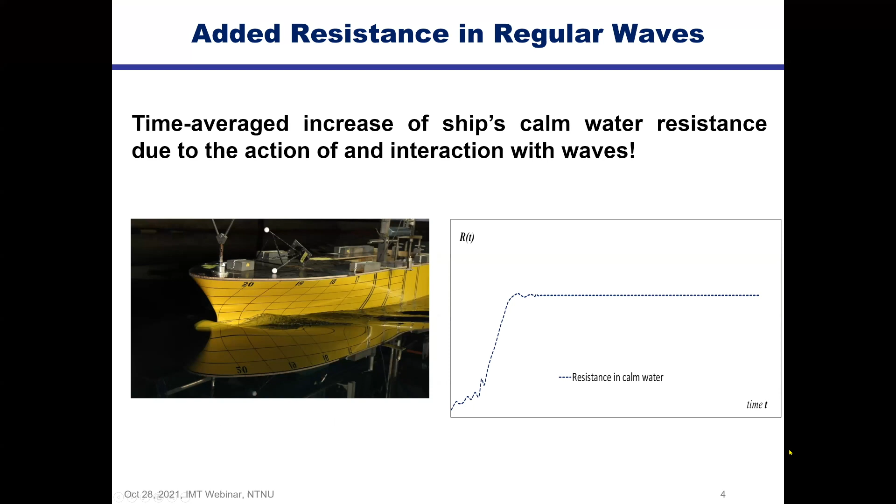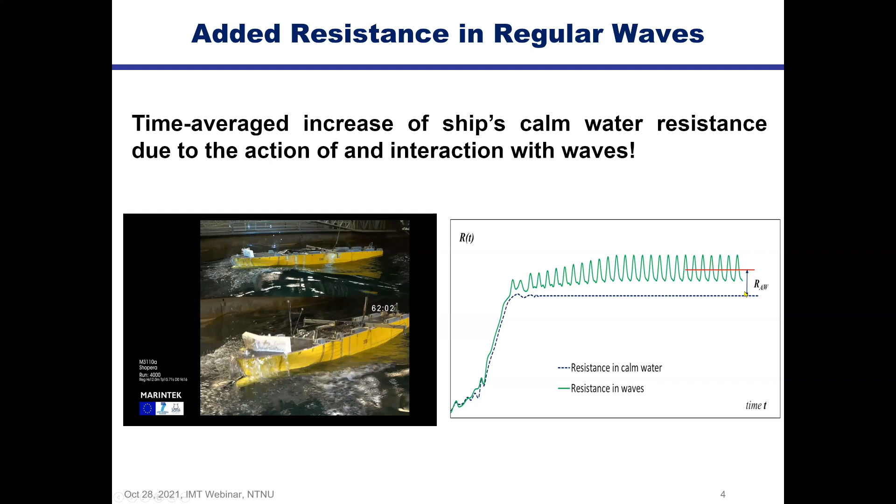In a towing tank, we would first measure the resistance in calm water, and we can get a curve. That is the calm water resistance. And then if we repeat the test in waves, then we may measure a second curve, and this curve is the resistance exerting on the ship in waves. So what we care about is this time average increase compared to the resistance in calm water. We are not talking about the instantaneous difference, so it's the time average increase we care about.

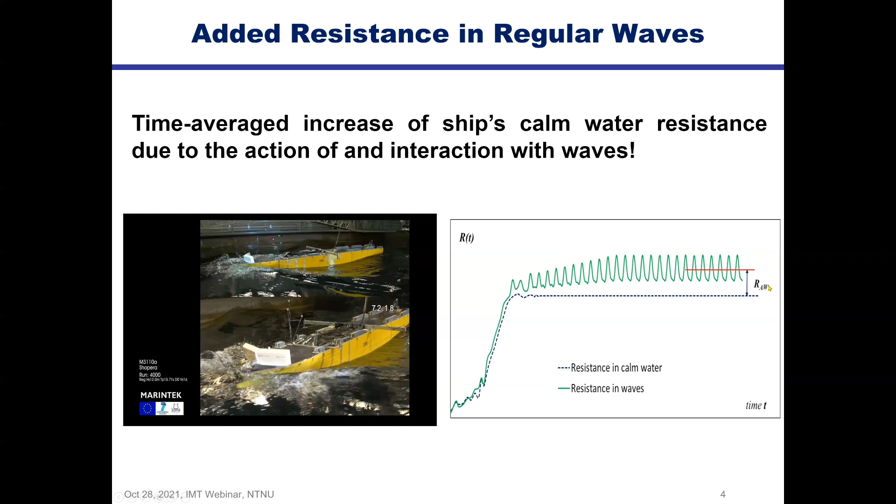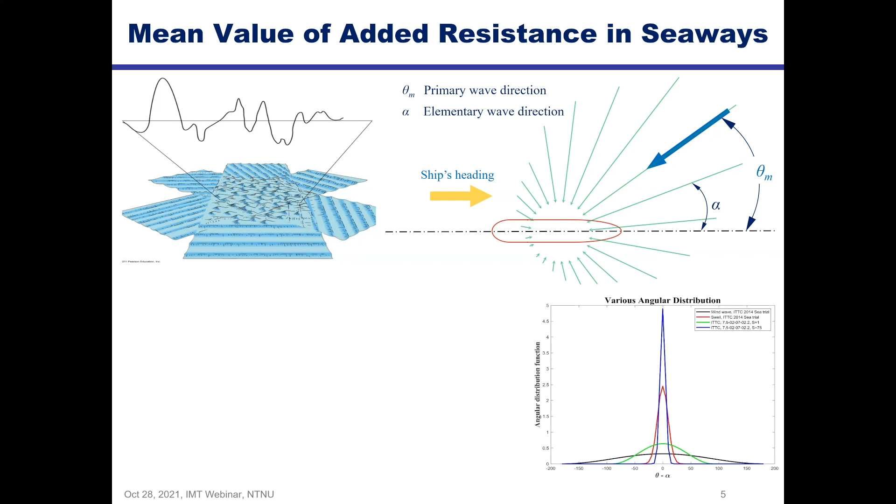So for ships sailing in a seaway, the seaway is normally described by a spectrum. Of course, in reality, when the ship sails in a seaway, the wave or the seaway condition comes from a certain direction, what we call the primary wave direction. For this wave, there will be many elementary waves coming from random directions, all the directions actually.

Depending on the scenario, there can be different angular distribution functions employed to describe this situation. That being said, if the seaway condition can be described by a directional spectrum, which includes not only the frequency spectrum but also the angular distribution, then the mean added resistance in the natural seaway can be calculated using this double integration. So given this frequency spectrum and angular distribution, we need to determine the added resistance for a given ship speed, arbitrary wave heading and arbitrary frequencies. So we need this transfer function to derive the mean added resistance in waves.

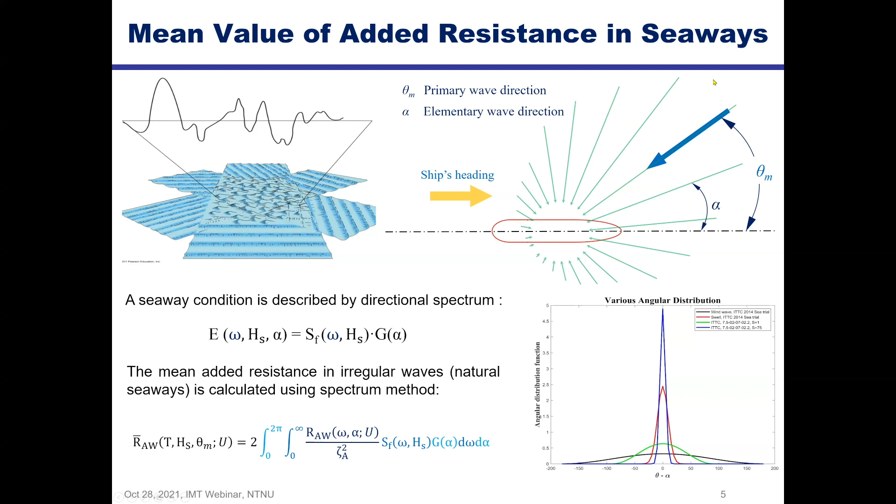So for the prediction of this RAW, or this transfer function of added resistance in regular waves, there are actually quite a few methods available. As we see, this is essentially a sea-keeping problem, so all the methods that were developed for sea-keeping prediction can be used or extended to predict added resistance.

This 27th ITTC Sea-Keeping Committee has reviewed all these methods and given a very thorough review. They can be roughly classified into 4 categories. The first is the towing tank test, regarded as the most reliable approach and the yardstick for developing or validating numerical tools. Besides that, there are also CFD methods, potential flow methods, as well as analytical or semi-empirical approaches.

At the moment, there are also new data-driven methods emerging, but these are mostly in a primitive stage because of the limitation of available data.

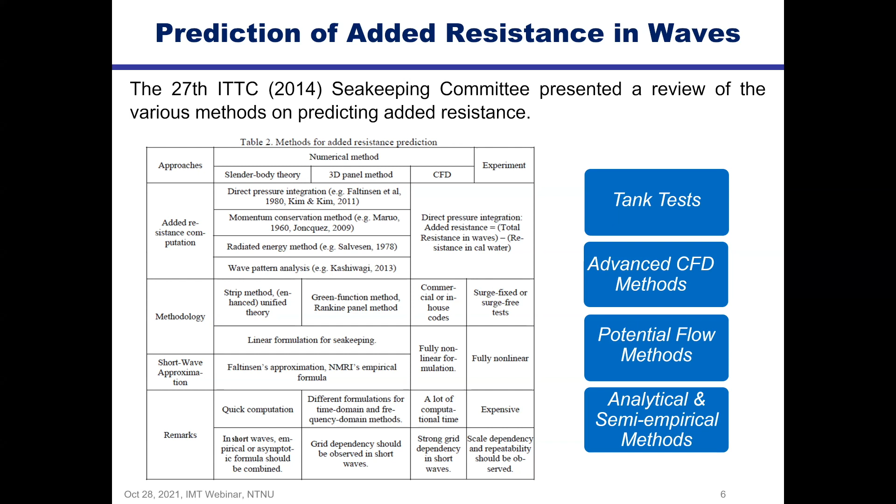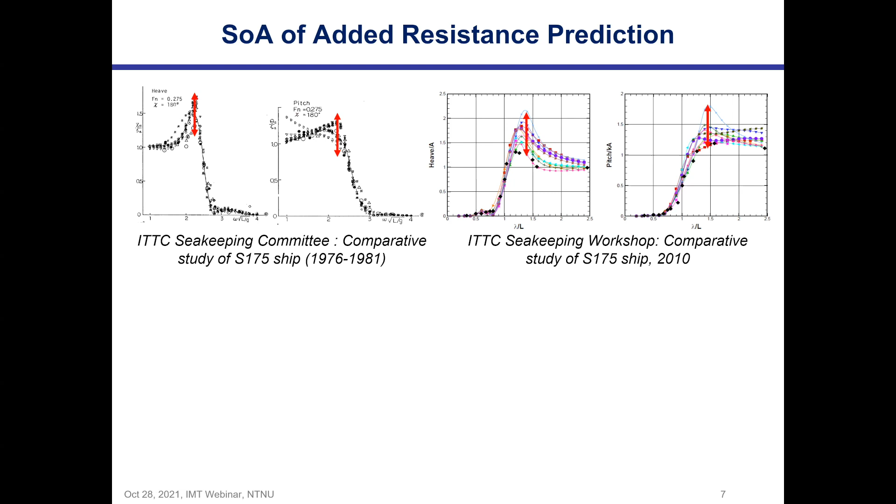You can see that not only in the peak region, but also in the short waves, high frequency region, there's a lot of scattering. Considering this situation, it seems it will take a long time for all the methods to arrive at a more converged state, and probably a better approach would be to develop a transparent, semi-empirical approach to tackle this problem.

This was the thinking we developed some years ago, and we started to work on this semi-empirical approach.

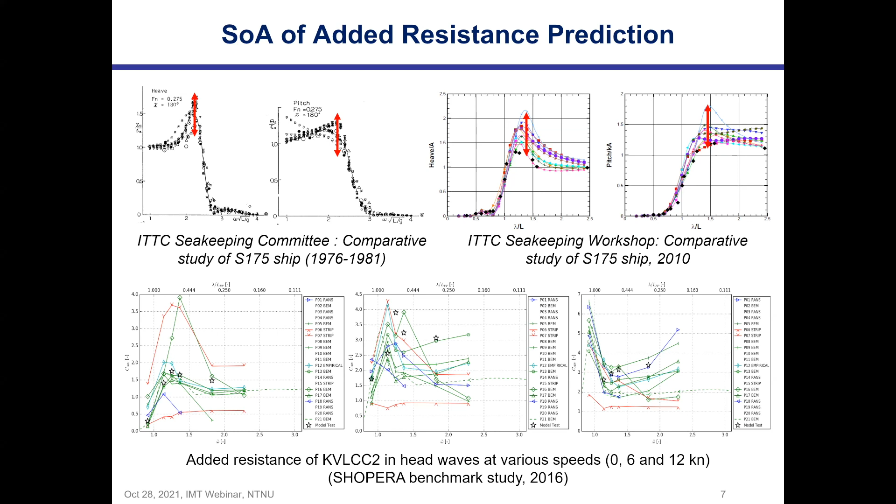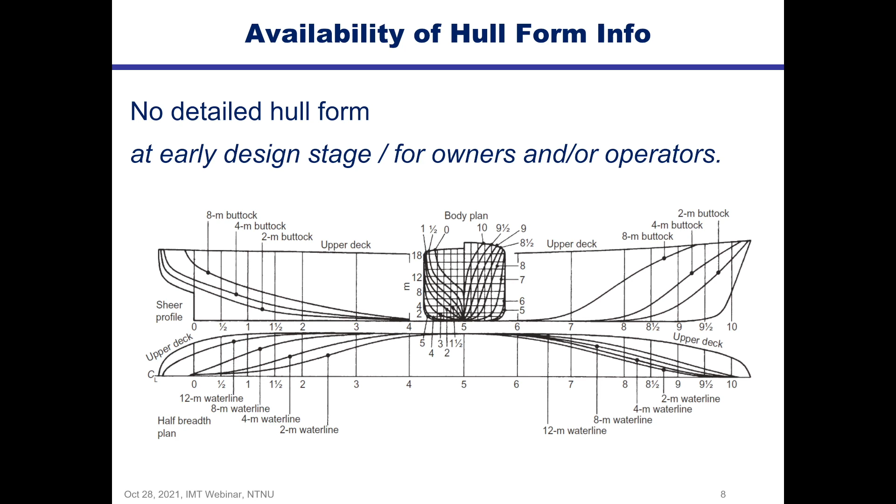Another point I'd like to highlight is that in practice, there are many scenarios where we don't even have the detailed hull form to set up a model to run advanced high-fidelity simulations. For example, in the early design stage, we don't have the hull form yet. Also, for owners and operators, the most detailed information they may have is the lines plan, and constructing a model for simulation from just the lines plan will actually induce further problems. All of this led us to consider developing semi-empirical approaches.

Besides that, there were some urgent demands from the industry. First of all, at that time we were working on the minimum propulsive power assessment problem, and there was a demand for a semi-empirical approach, but there wasn't one available.

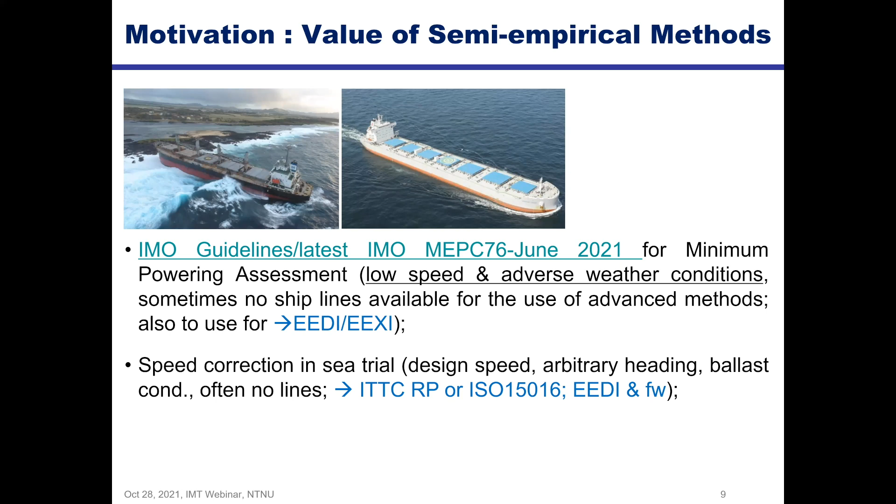Secondly, there was also a demand from speed correction in sea trials. It was very interesting that we were approached by both owners and designers complaining about sea trial results, which made us further study this procedure and identify some further problems.

A third subject is from ship performance analysis, which is of high interest at the moment. You can imagine that for data monitored on board ships, this data is heavily polluted by the operational condition and the seaway, and needs to be cleaned or processed before further treatment.

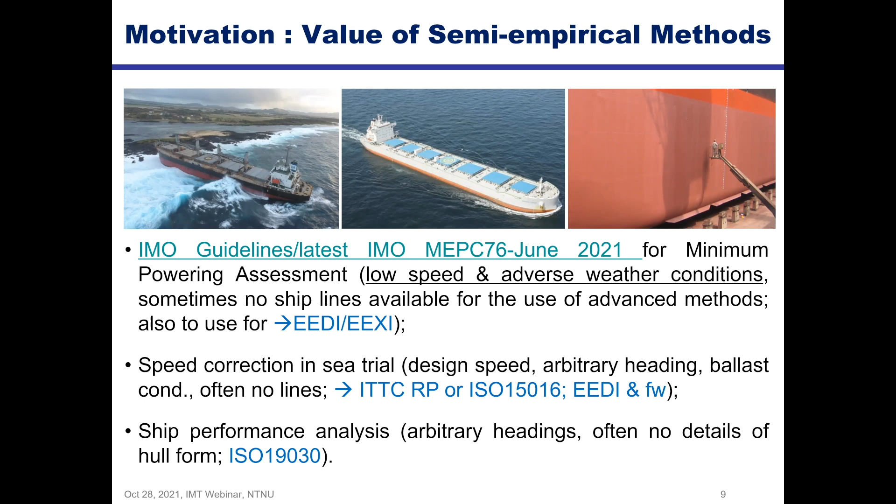That is our motivation, and next I will start to elaborate how we developed this method.

First things first, here is a brief timeline of the development of this method. We started development in the Shopera project in 2013, coordinated by the National Technical University of Athens. In the first stage, we developed the method from head waves to beam waves. Later, from 2017 to 2020, we extended the method to arbitrary headings and validated it. This work was done at Nanyang Technological University.

During this process, Maric China was supporting our development very actively. So in the end, we named this method the SNNM method, just to acknowledge the contribution of each consortium and institution.

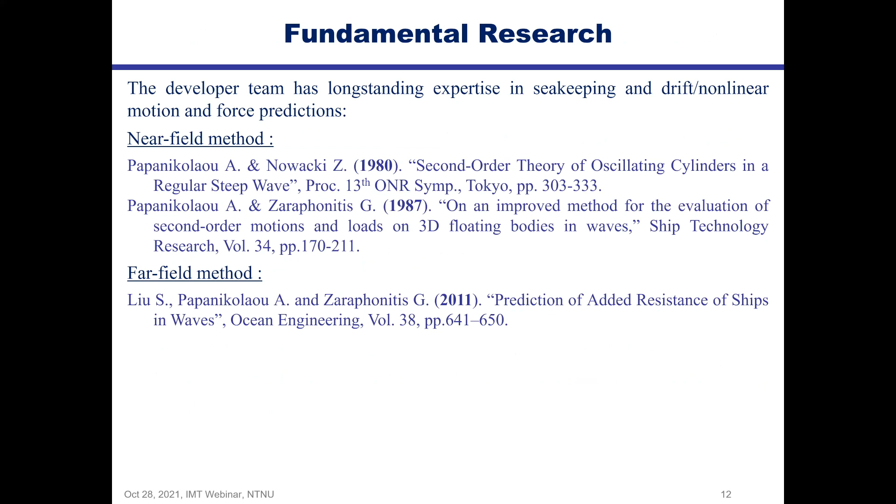A few words about the background of this developer team. At the National Technical University of Athens, Professor Papanikolaou already worked on this problem in the early 80s. For myself, during my PhD study, I also worked on a far-field method to predict added resistance, and more recently we have been focusing on the diffraction effect. All this fundamental research provided us very useful tools to investigate the relationship between the hull form, wave condition, and added resistance.

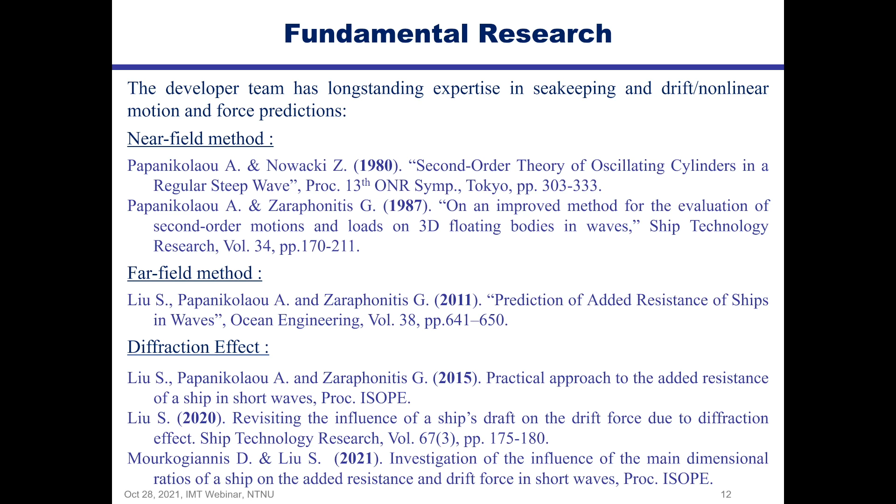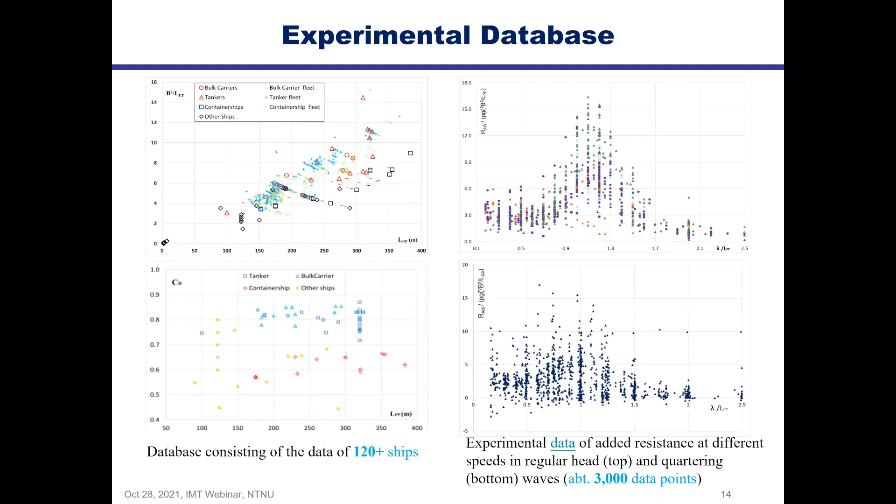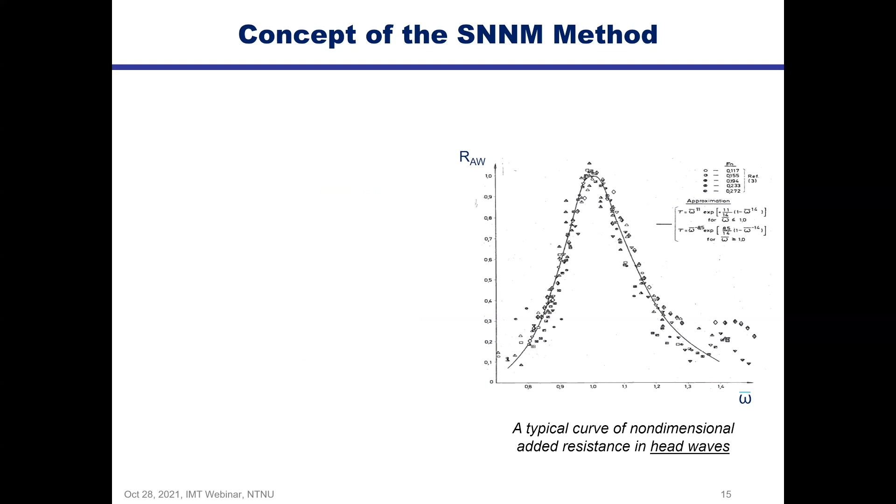Coming to the concept of the method itself, this slide shows a typical graph for this resistance increase in head waves. For predicting the added resistance, we followed a quite traditional approach. The total resistance increase is approximated by the summation of the reflection effect and motion effect. For the reflection effect, we based our work on the method proposed by Professor Faltinsen, and for the motion effect, we used the method proposed by Jinkine and Ferdinande in the 70s.

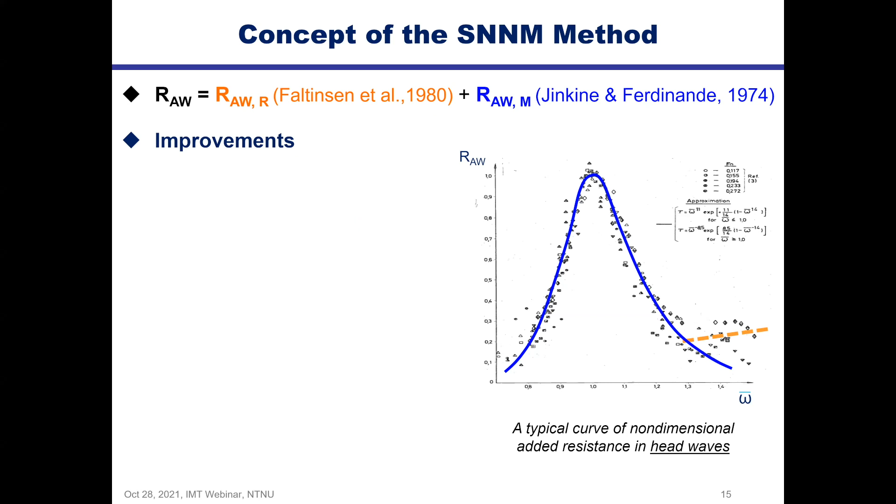For the short waves, the method of Professor Faltinsen is mainly applied only for short waves, and for the motion effect, this empirical approach by Jinkine and Ferdinande can be applied. But neither method is perfect. There were a lot of limitations to these methods, considering the time and the specific task they were addressing when they were developed. So our work was actually to introduce more improvements and corrections to make the formulas more versatile, so that they can deal with various scenarios.

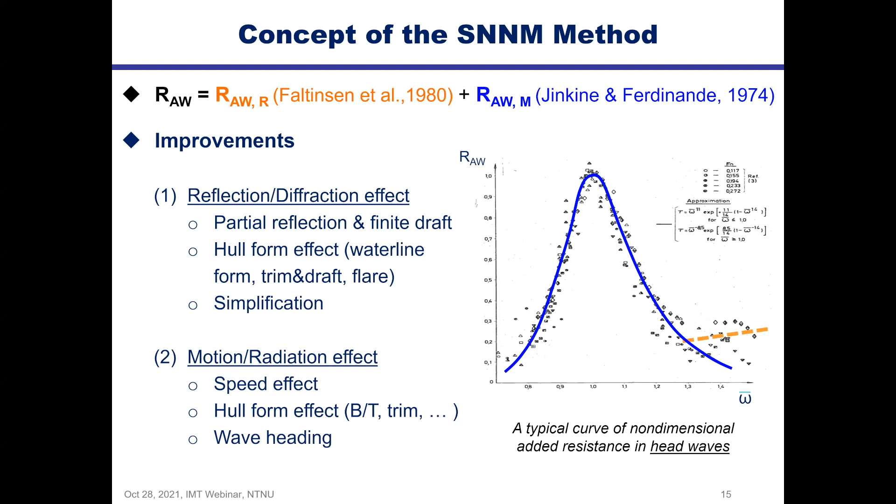In the following, I will be elaborating on how these improvements were introduced. Let's start from the reflection effect, or diffraction effect.

For this part, the pioneering work is from Havelock, when he studied the drift force exerting on wave breakers. He developed this formula.

Following that, Fujii and Takahashi introduced two correcting factors: one for the speed effect, one for the reflection coefficient. This reflection coefficient was actually studied by many physicists. The specific form was proposed by Ursell, or Evans and Morris, for different directions. It is a reflection coefficient for when the wave is reflected by a thin barrier.

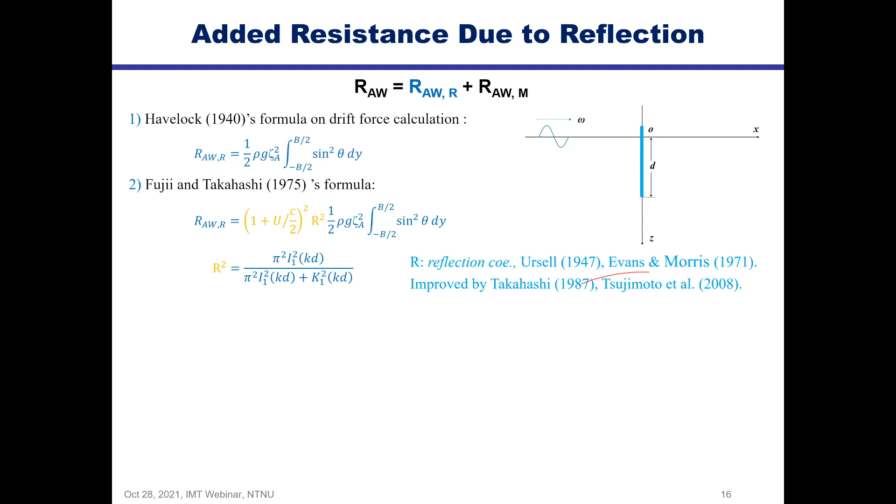And this approach was further improved by Takahashi and Tsujimoto et al. in 2008.

A third work was from Professor Faltinsen in the 1980s. He proposed a very elegant method which is applicable to arbitrary wave headings, and also accounts for the forward speed effect. In his work, the viscous effect and the diffraction effect from sharp corners were neglected.

A fourth work is from Kwon in 1982. He introduced three correction factors: one for speed, one for scattering, similar to the reflection coefficient, and another very interesting one, the finite draft effect. What he said essentially is that when the reflection phenomenon takes place, the reflected wave will only have impact on the structure from the free surface to the bottom. This is very correct, and it was also theoretically confirmed by Ogiwara in 1996. However, this finite draft effect was totally neglected by the following researchers.

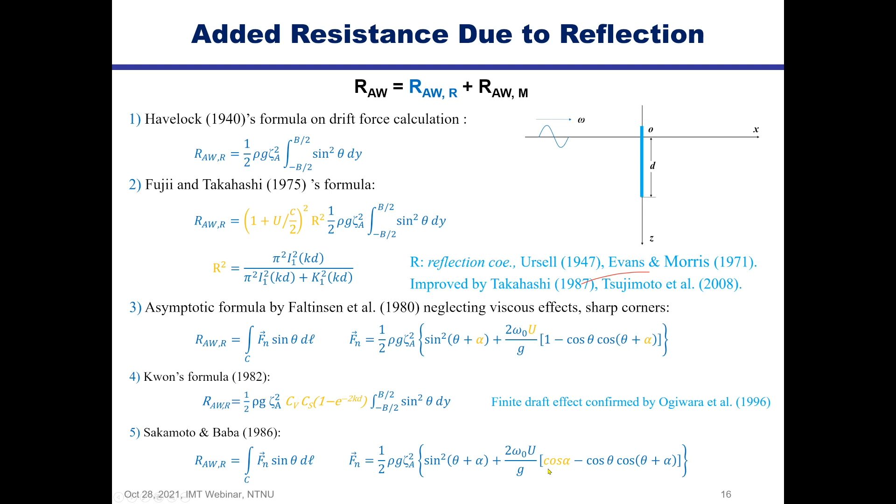Reviewing all this work, we proposed a physically more complete formula. It is based on the work of Professor Faltinsen, but we introduce here the finite draft effect and reflection coefficient, as well as the contribution from the effect of the flare angle at the waterline. Of course, we need to note that this reflection coefficient is not for a thin barrier. Instead, it is for a thick barrier, which is more ship-like.

Very satisfactory. For more general cases, particularly for ships, for fine ships sailing with forward speed, we would still need to introduce another factor to make empirical corrections, so that this formula can be applied to both full ships and fine ships at various speed.

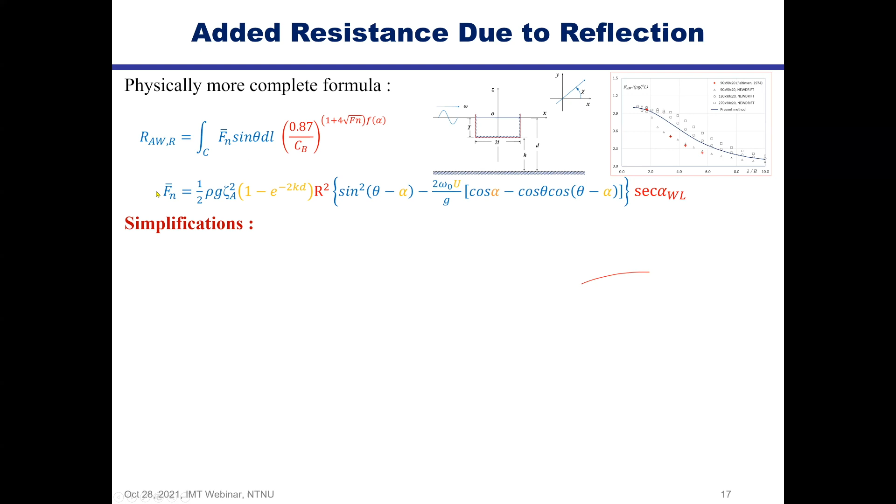So next, we introduced some simplifications for practical reasons. The first thing we did was to use only one or two points on the waterline. We introduce a length of entrance and length of run for the waterline. By doing that, we can have two components calculating this added resistance due to diffraction effect, so that we can avoid calculating this integral.

So calculating the integral is not a big issue, but in practice, very often we like the formula to be as transparent as possible and as easy as possible for the practicing engineers.

Following that, we also need to further simplify this draft correction, which includes two terms. One is this 1 minus e to the power of negative 2kd - this is the finite draft effect. Another one is this r squared. You can see that this r squared calculation itself requires a lot of effort.

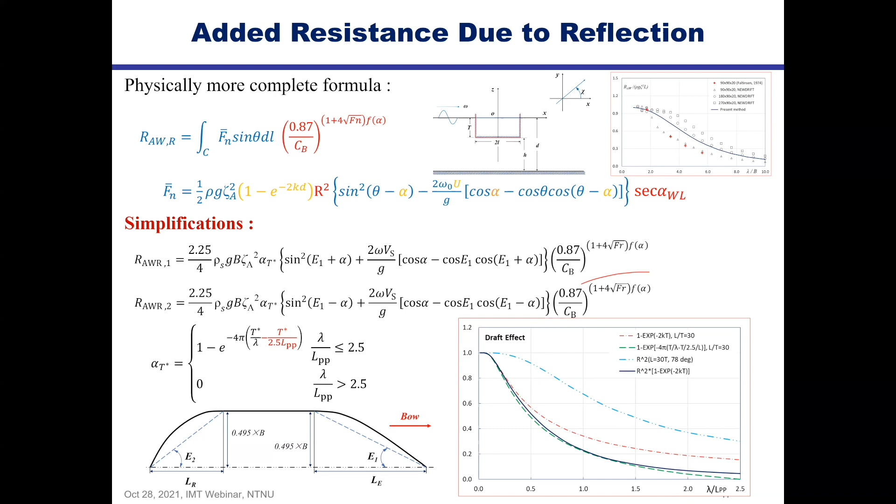So with that, we finished our work for the diffraction or reflection effect. Next, we are going to introduce the effects for the motion effects.

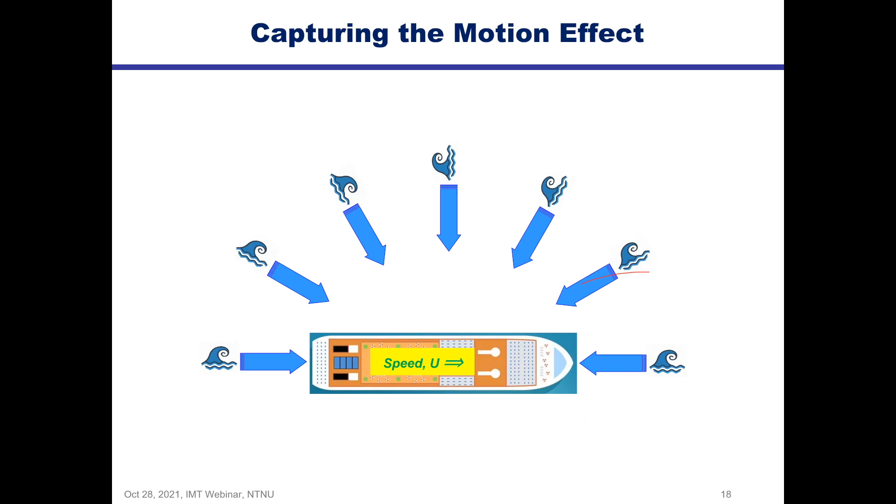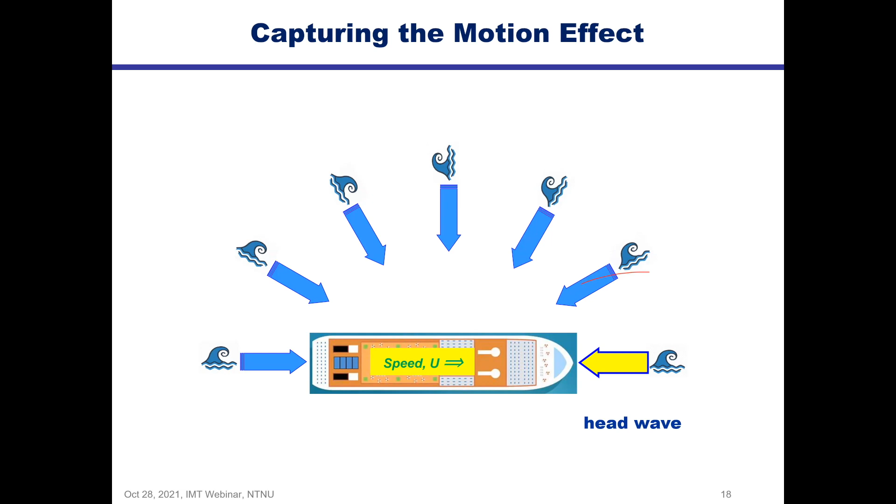So for a ship in longer waves, wave may come from any direction. The method of Jinkine-Ferdinande is working for head wave only. So we started also working on head waves, and by introducing more corrections.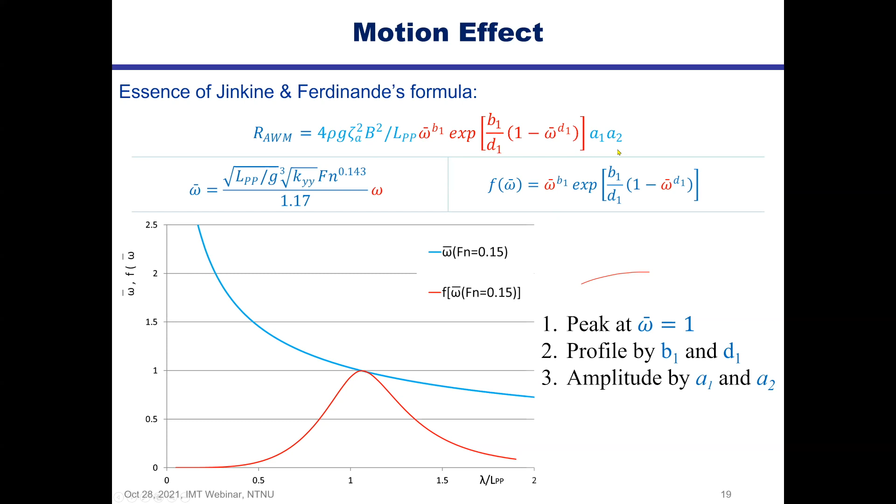So in order to improve that, we need to think: if we'd like to adjust the position of the peak, we need to adjust the omega bar. If we'd like to adjust this profile, we need to adjust B1 and D1. The same applies to the amplitude - if we'd like to adjust the amplitude, we need to add some extra terms. So that is the structure.

And the first work we did was actually to improve the formula for ship speed, more specifically to have the formula work well for low speed, because this was directly driven by the IMO developing the method for supporting the IMO guideline for minimum propulsive power assessment. So for that work, mainly we are concerned at Froude numbers equal to 0.05 and even less.

So we examined the performance of this omega function of omega bar. When the Froude number is extremely small, following this expression, it would give us this red curve - totally wrong. And the same applies to a2, which is about the amplitude. If we follow the original approach, it leads to the situation that at Froude number equal to 0, the amplitude will be 0. So these are not correct.

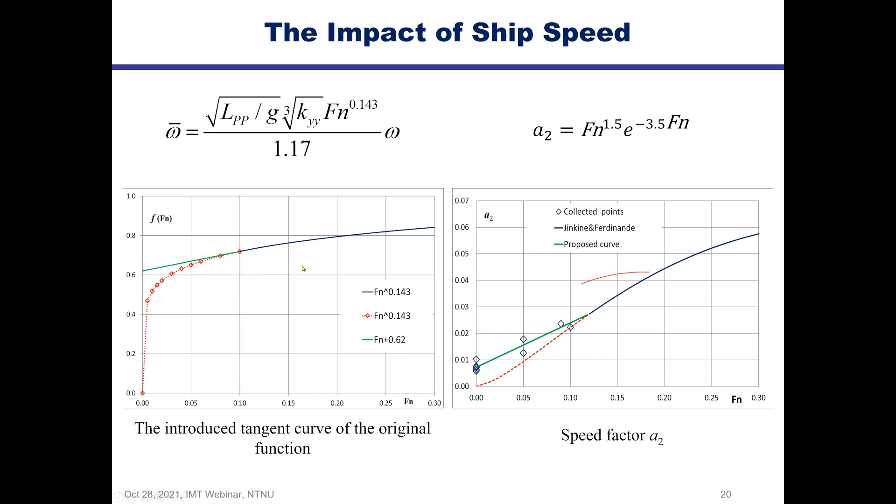So what we did was use some experimental data and numerically generated data to get these omega bar values for this low speed range. And then we could introduce some simple expressions for this low speed range. So this is the first work we did.

A second work was actually on the impact of ship type, noted by block coefficient. In our early application, we noted that there was some slight mismatch between the prediction and actually experimental results, particularly for full ships. It's not surprising, because the method of Jinkine and Ferdinande was originally developed for fast cargo ships.

We carried out numerical calculations, and we justified this ship type impact in terms of block coefficient, and we introduced this block coefficient into the formula - so this can actually be viewed as a result of a data-driven approach. We checked the data, identified the problem, and then we proposed a solution.

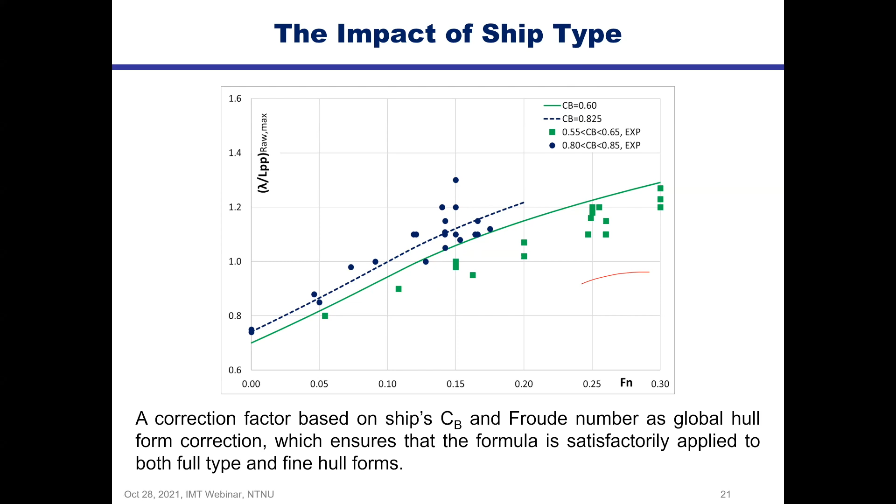So the next problem we studied was the impact of main dimension ratios, given a situation of B over T. When B over T systematically changes, we can actually predict the added resistance, and we can see that it follows a specific trend. When B over T increases, both the amplitude and the location of the peak value change in a certain direction. So if we pick out this value, we can see that they follow a certain trend at different speeds, at different Froude numbers.

And this can be captured by introducing some very simple functions based on this B over T value. So with this, we can extend the formula to work not only for standard B over T about 2.5 to 3, but also for very high B over T values. It is important for ships in ballast condition and bulk carriers.

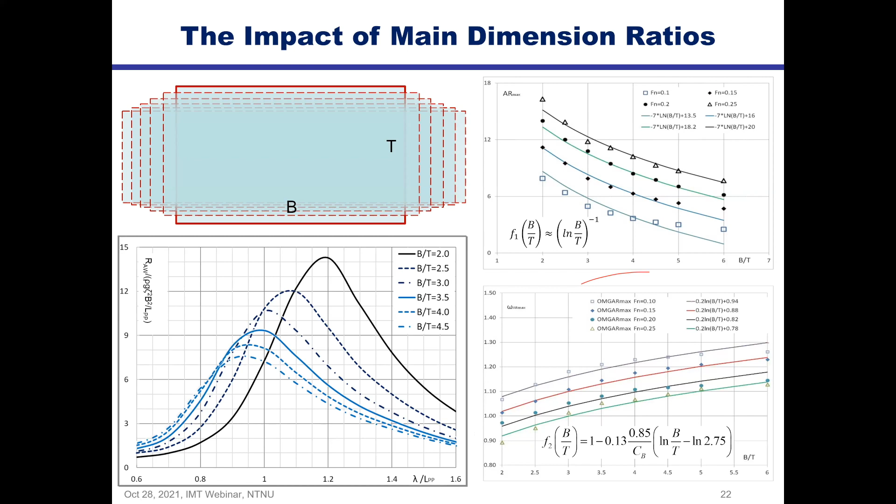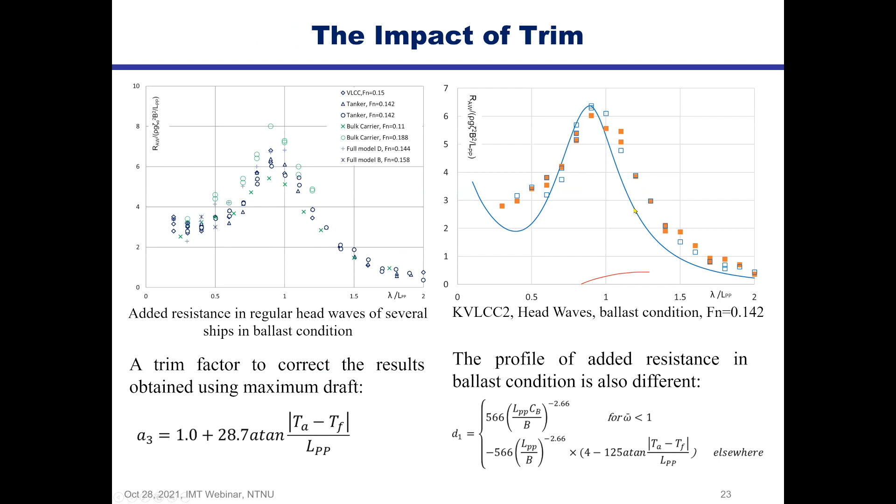It seems that they have their own specific pattern, and then we examined the difference between the original prediction and this experimental data. By examining the difference, we identified several correction factors, including the amplitude, as well as this D1, which is used to calibrate this profile in longer waves. So that is our work on the impact of trim.

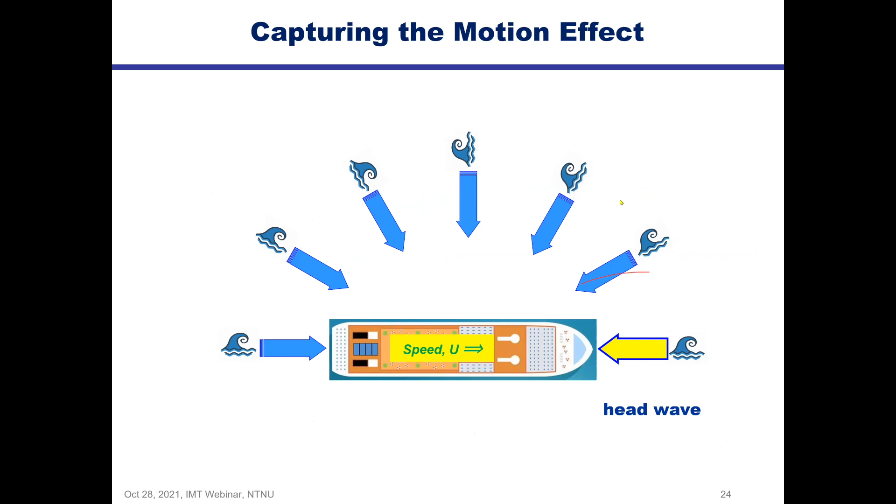So with that, we finished our work extending the formula in head waves. Next, we worked on following waves. Following waves is a very tricky problem - here you can see a container ship in following waves, with the container ship features overhang. So this kind of feature is very difficult to capture for any type or kind of numerical approach.

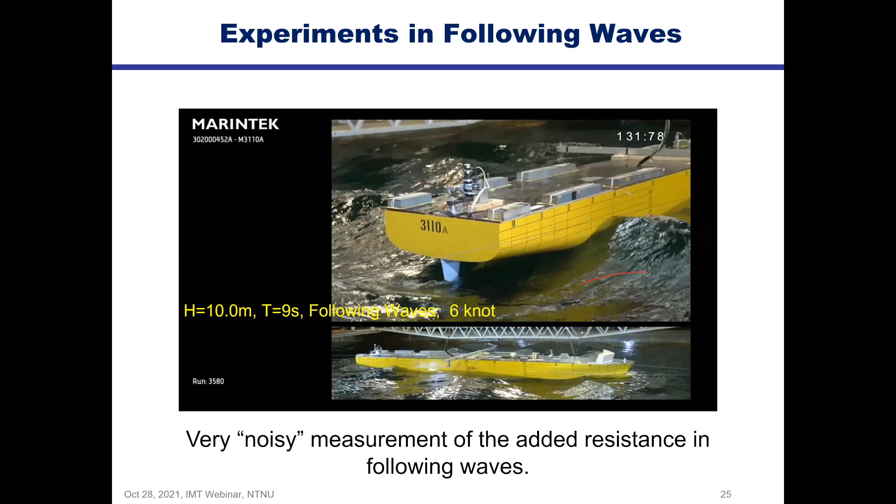For us, this was also a very interesting point to work on. Remember that we already have a formula that works at zero speed for head waves. For a fore-aft symmetric hull form, whether the wave comes from a head direction or from stern direction, it is the same from the hydrodynamic point of view for a symmetric ship.

This gives us the courage to apply the method for following waves. So when we applied the original formula to predict the added resistance of a bulk carrier at zero speed in following waves, the agreement between this prediction and the experimental result was excellent. Remember that for short waves, we already have a formula which is valid for

arbitrary directions and arbitrary speed. So our task then is reduced to working out the radiation effect, how this peak point will change with the increase of speed in following waves. So that is our task.

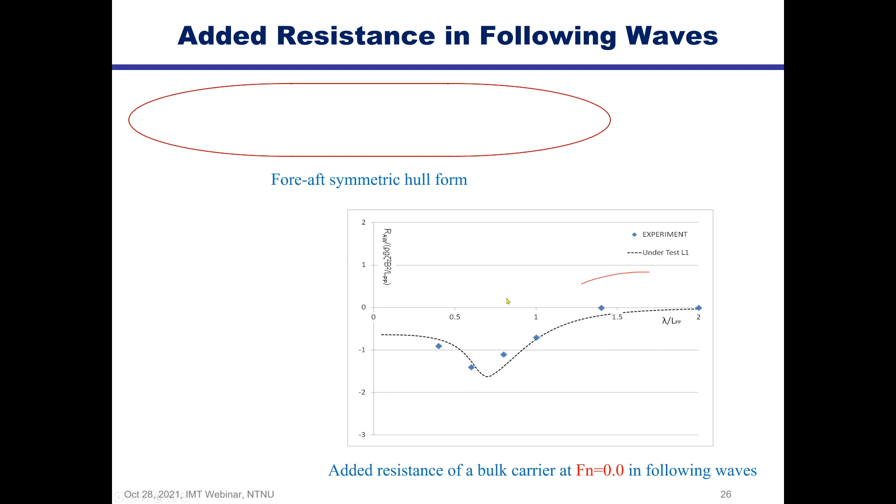Actually, there was not much work on added resistance in following waves. We didn't have much idea. However, we were inspired by the concept when examining this formula for the diffraction problem, examining this formula for diffraction for the resistance, added resistance due to diffraction.

If we set this as 0, we can get the conclusion U equals VG. This is very interesting. That means when the ship speed equals the group speed, then the added resistance due to diffraction is 0. This is a very interesting point. It is in line with the fact that the energy of the wave propagates at group velocity.

So this gives us the reason to examine or check the relative velocity between ship speed and wave velocity, whether it is group velocity or phase velocity. From that point we could actually get our formula for following waves.

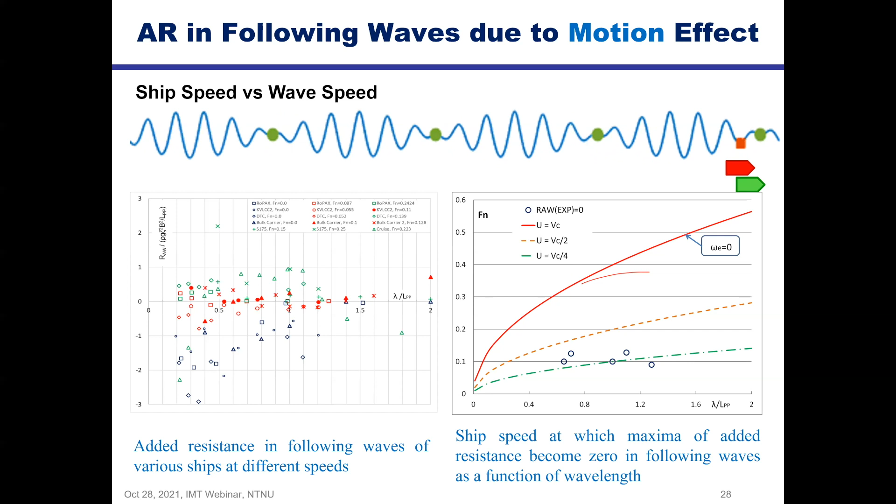So this is a very important reference condition. Having this reference condition in mind, we could do the following. When the Froude number is 0, ship speed is 0, we apply the original formula to calculate the added resistance in following waves. In that case, it is a drift force pointing in the positive direction — it's added thrust.

And when the ship speed is half of the group velocity, following our conclusion, the radiation effect should be 0. This gives us the conclusion that the ship needs a speed of half of the group velocity to escape from the drifting effect of the wave.

Then if we give the ship an extra speed of half of the group velocity, the added resistance exerting on the ship would be the same as if the ship were in head waves at zero speed. So for any points between zero speed and half of group velocity, or between half of the group velocity and group velocity, we can apply linear interpolation.

For even higher ship speed, we can treat the scenario as if the ship were in head waves, but applying this relative Froude number, defined as U minus group velocity, over the square root of GL. With that, we get a solution for the added resistance in following waves.

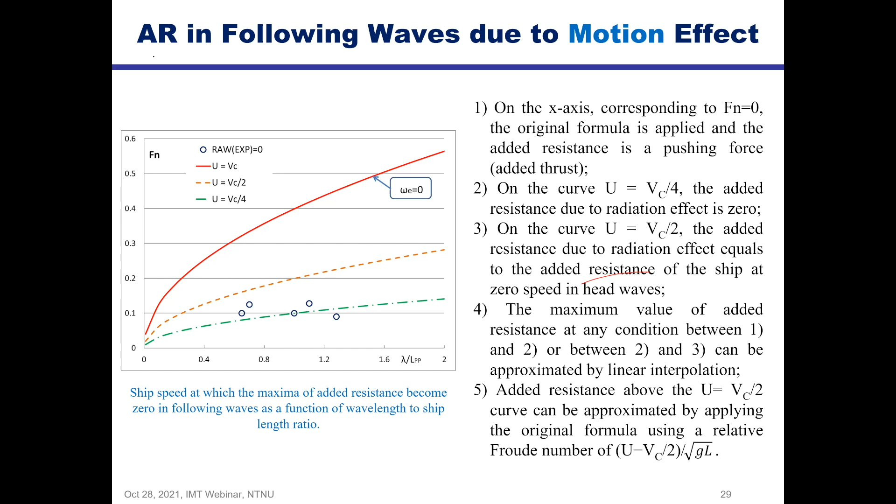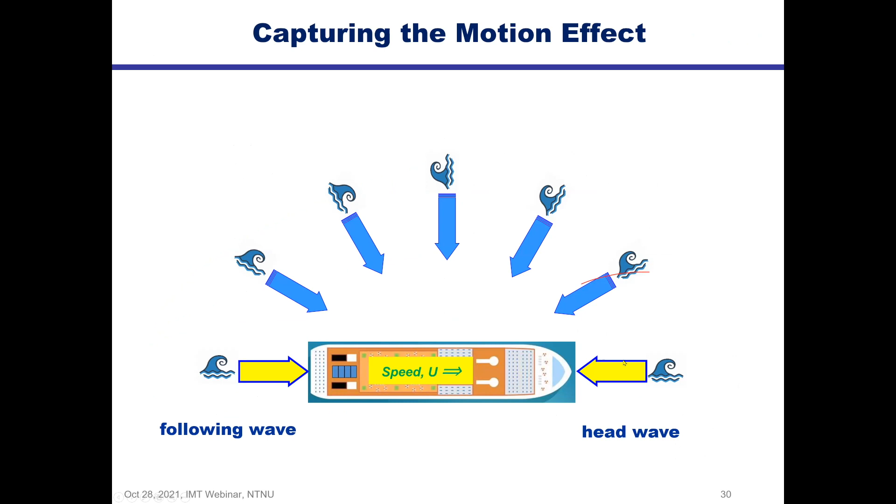Once we finish this step, we can start working for other headings. For bow waves, following sea-keeping theory, we know the resonance region will change with the frequency we encounter, and we can calibrate this peak value with observed experimental data and numerical data. So we can get simple functions to capture the change of the maximum value of the added resistance and its location. For stern oblique wave cases, remember we have extended the formula to the beam wave case already. Since this value in stern oblique waves is normally very small, we can apply direct interpolation between the beam case and following wave case to get this result.

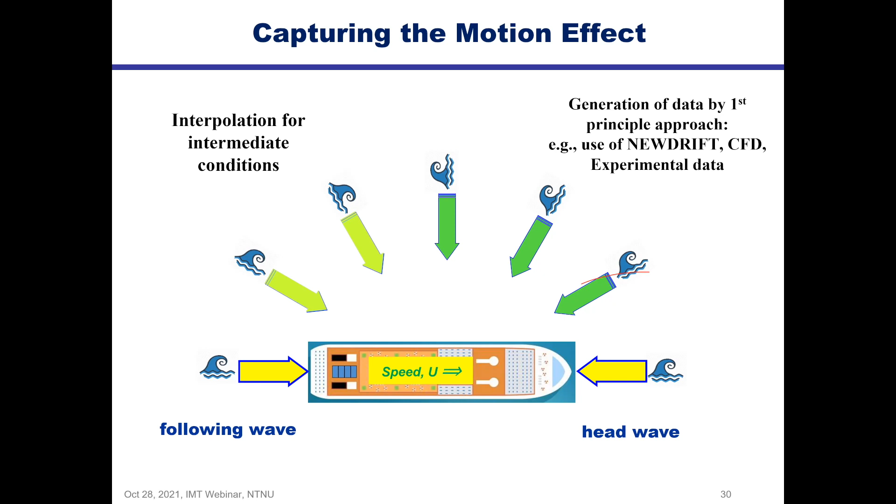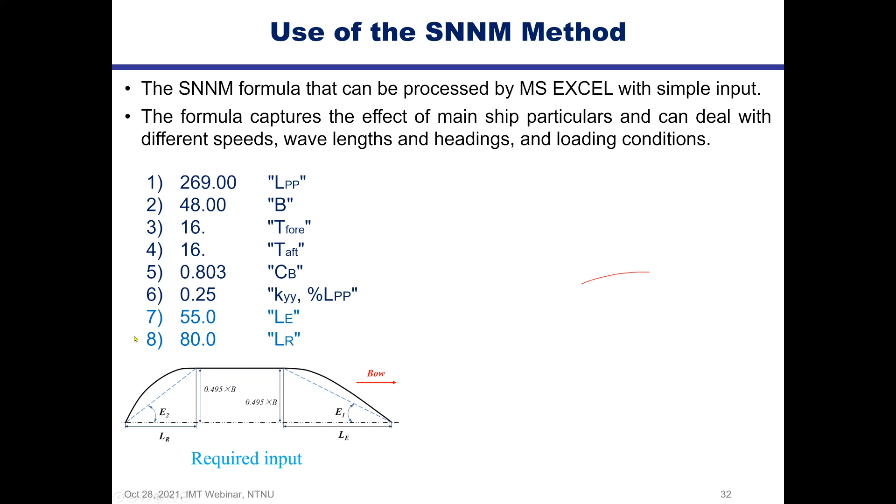So we have formed the whole formula, and to execute it we need the input of 8 shape parameters: length, beam, drafts forward and aft, block coefficient, pitch radius of gyration, and 2 waterline parameters. With these 8 given shape parameters, we can generate the added resistance surface for arbitrary wave headings and any frequency.

Generating this surface was done in an Excel environment and costs only about 10 to 15 seconds. If you do this calculation in Fortran, it will cost less than 1 second, because the code is only about 200 lines.

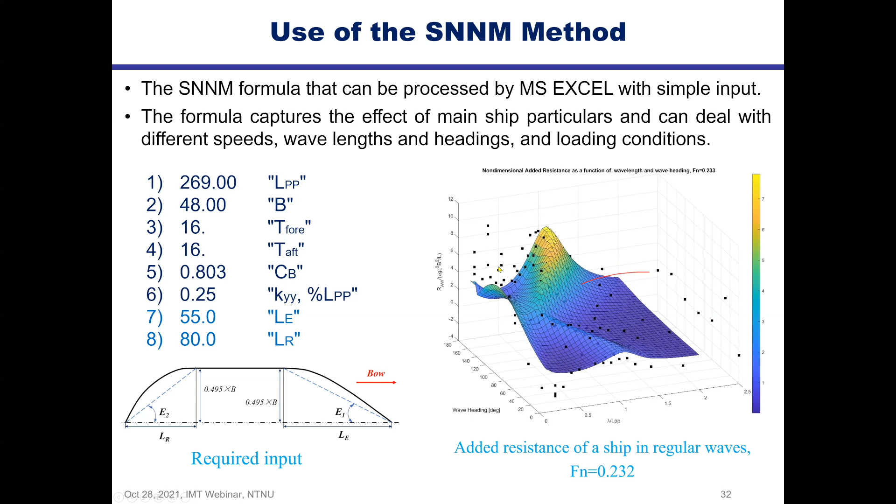On the other hand, to get this scattered experimental point data, you know how much effort and resources we need to devote.

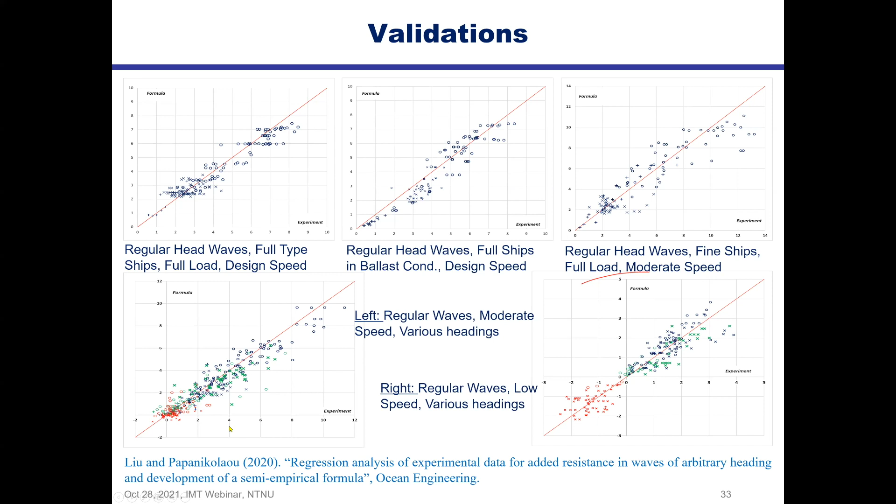After this development, we did some validation. This shows several cases for different headings, speeds, and loading conditions. You can find the details of these validation cases in our publication in Ocean Engineering.

Next, I will use a few slides to share the validation results at ITTC. This method was first circulated to ITTC at the end of 2019 by invitation, and in January 2020 I presented this method at the 4th meeting of the specialist committee.

The validation work started in April. After an extensive large-scale validation campaign, this method was finally accepted by ITTC, adopting it into the recommended procedure for analyzing speed trial results, earlier this year in March.

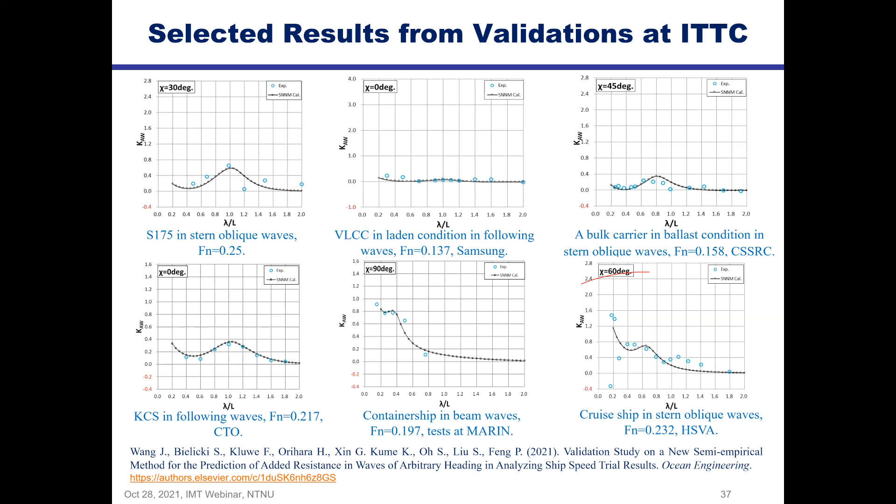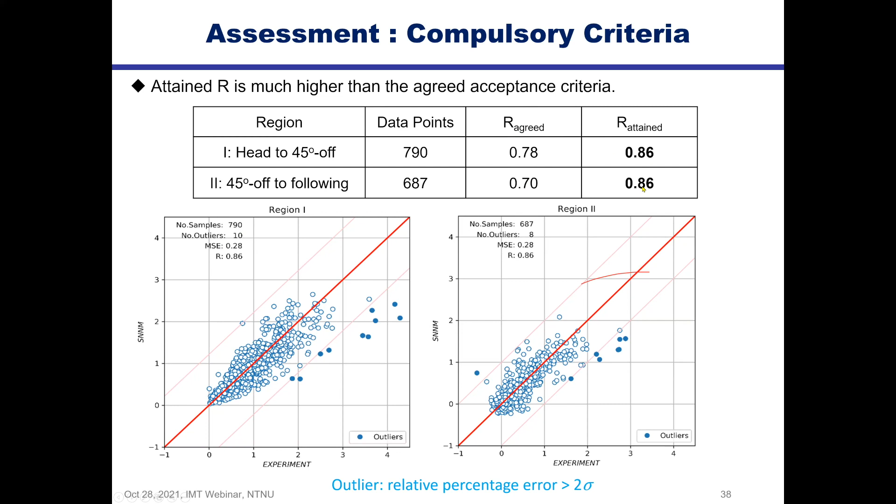This slide shows the assessment result for the compulsory criteria set up by the SOS committee, stating that to be accepted by ITTC, the correlation coefficient R should be at least 0.78 for bow waves and 0.7 for other headings. Using this established database, the attained R for bow waves and other headings both reached 0.86.

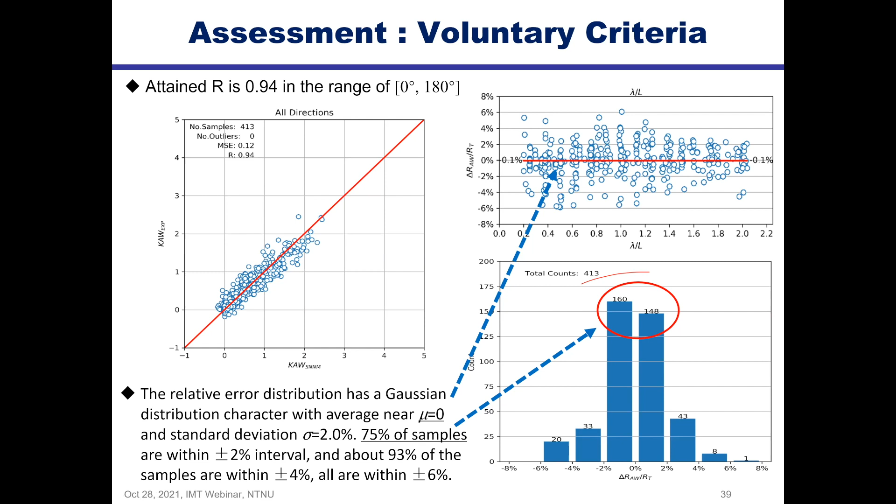There was also a voluntary criteria for assessing relative errors for arbitrary headings. Less data was contributed for these voluntary criteria, over 400 points. This study shows the distribution of relative error is evenly distributed, with an average value of merely negative 0.1%. The error distribution also has a Gaussian feature, with about 93% of samples within the range of 4%, showing that this formula is very accurate.

There was also a face-to-face comparison with another method, STAwave-2, using this same database. STAwave-2 achieved a correlation coefficient of 0.7, while the SNNM method achieved a value of 0.86.

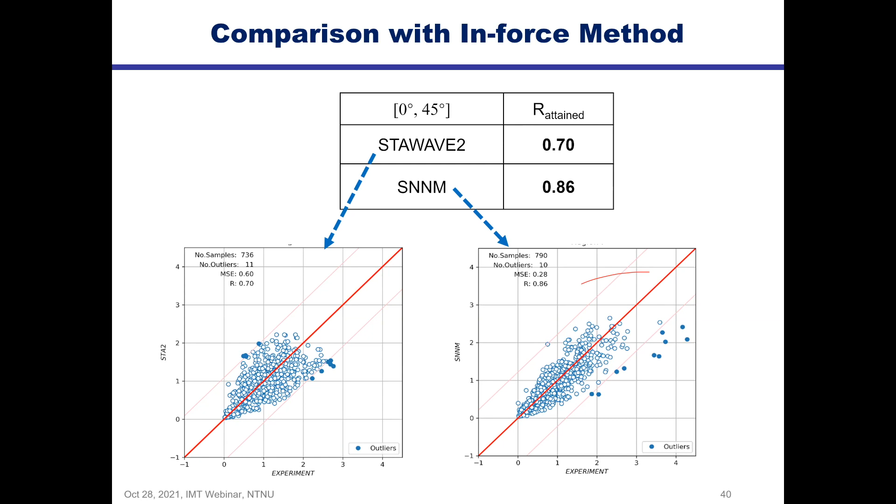With that, the Advisory Council of ITTC approved the formula to be adopted by the ITTC recommended procedure for conducting the analysis of speed power trials. That is openly available to the public on the ITTC site, and you can examine that.

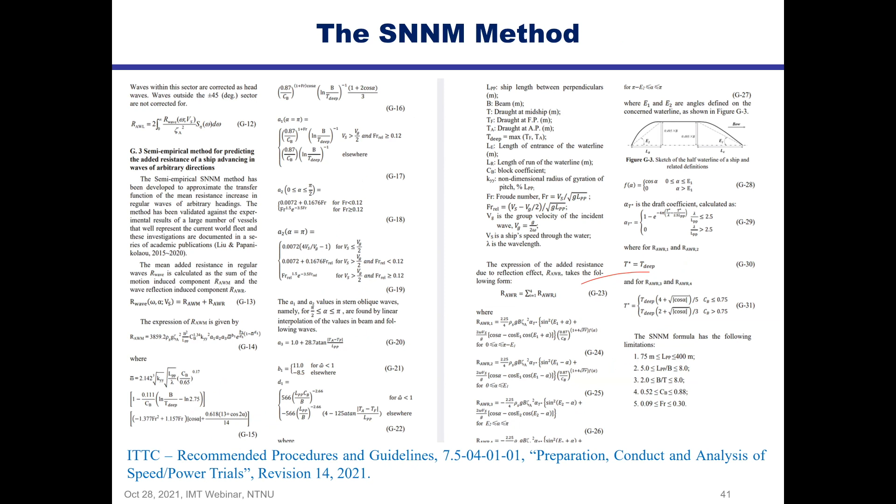So with that, I've finished the development, the presentation on the development of this method. In the following, I will just draw some brief conclusions.

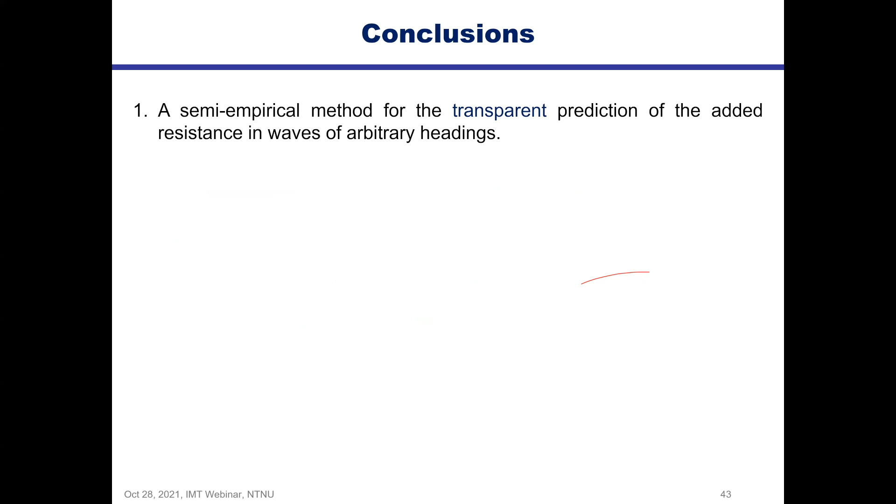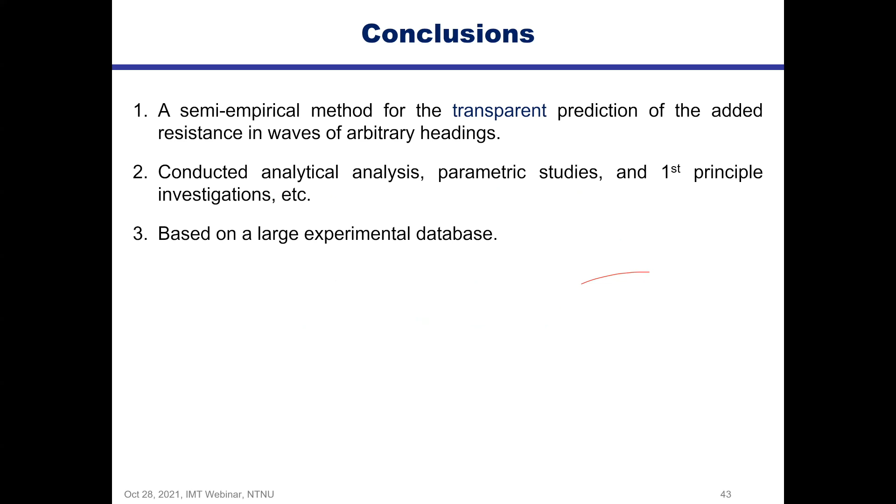In this presentation, mainly I presented the development of this semi-empirical approach for the transparent prediction of added resistance in waves of arbitrary heading. During this development, we conducted analytical analysis and parametric studies, and also some first principle investigations. And we also attuned the formula to a large experimental database.

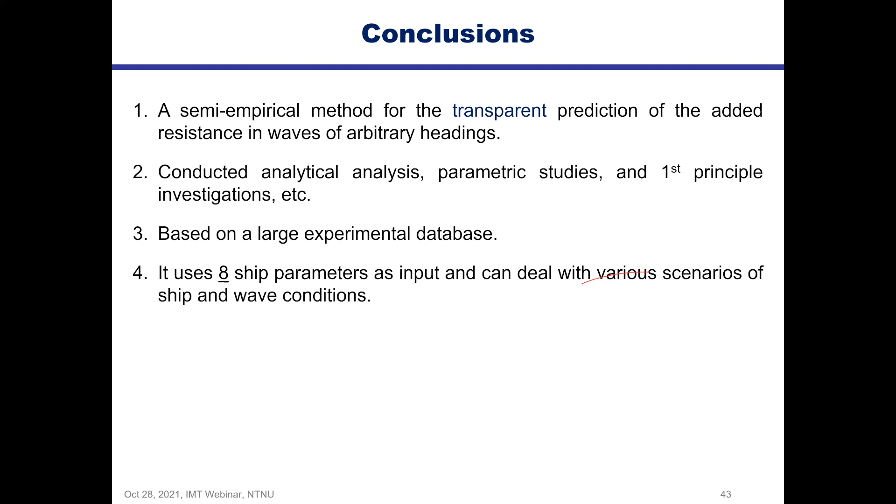So the formula uses only 8 parameters as input and can deal with various scenarios, which is very convenient for people in practice. And the formula was also validated by the ISSC committee with fully satisfactory results.

So in the future, we are going to collect or generate more quality experimental data or CFD data to cover more ship types. And we are interested also to study more specific wave conditions, particularly for short waves and steep waves.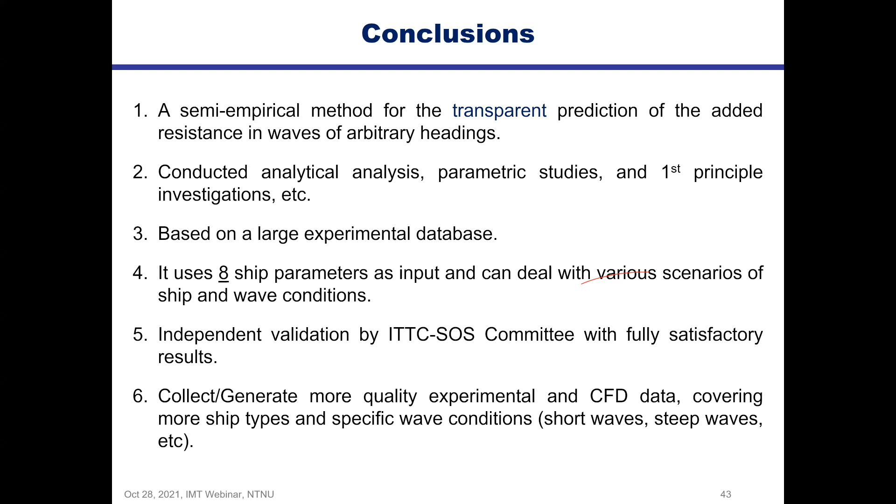So before completing this presentation, I'd like to acknowledge the contribution of the ITTC-SOS committee for validating this method and for increasing our confidence in this method. So that is my presentation.

So I shared more today about the methodology we adopted in developing this method. I hope this talk is useful for researchers working on added resistance prediction, and also for the engineers implementing this method to their practical projects. Thank you very much for your attention.

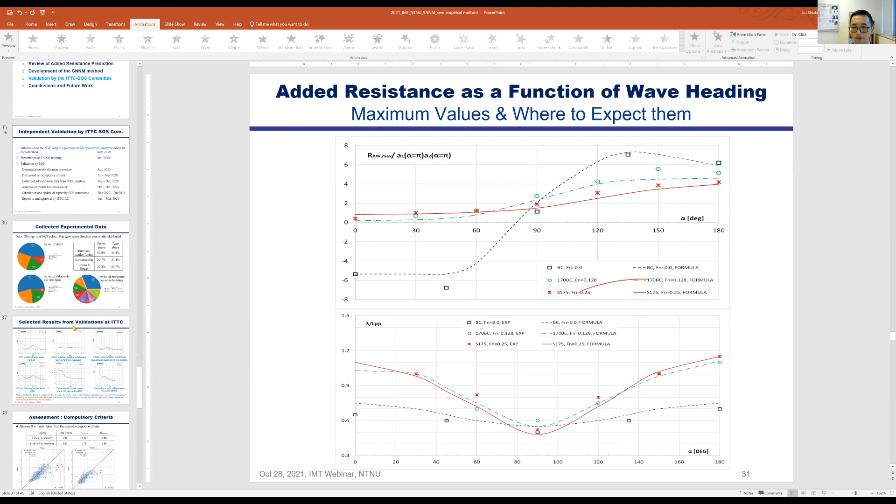However, when we compare these results with available test data in following waves and in stern oblique waves, the agreement is really encouraging. I'm sure there should be much more effort devoted to studying these scenarios, because this is a topic where very little has been published.

Yeah, I agree absolutely, and I think one of my major criticisms about experimental data in our field is that you only very rarely find people making a good analysis of the experimental uncertainties in their measurements. I think this is what we are really critically lacking, because if you were to actually calculate the experimental uncertainties and give that data as part of the measurements, then you have the opportunity to see whether your numerical calculations are actually within the uncertainty of the experiments or outside it. But without that uncertainty analysis, it's very difficult to make any conclusions.

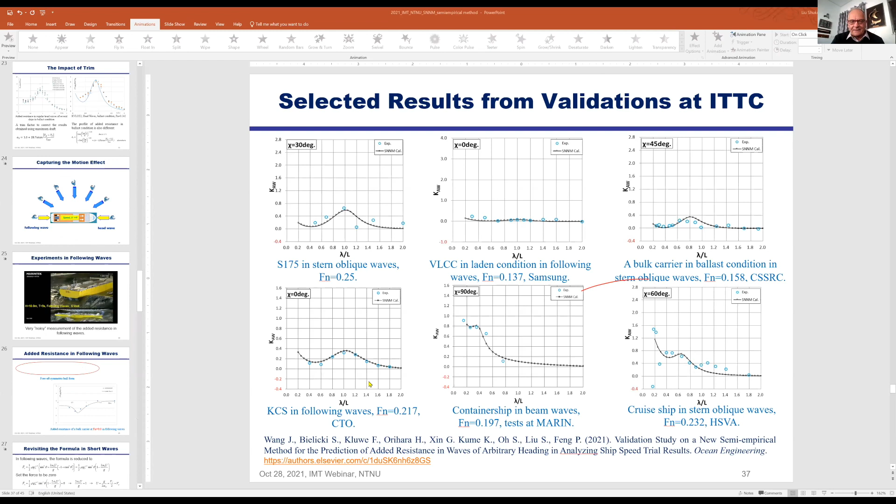I'd like to very briefly comment on the point Professor Bingham brought up, because this is a tricky issue, as Shukui already mentioned. In fact, he showed in an earlier slide experiments from MARINTEK, sorry, in this following wave case from the SHOPERA project, where if you see these experiments and similar ones we conducted with other ships in SHOPERA, you can say that any theory, any numerical approach, and also any experimental approach to capture this problem is actually very, very difficult, and it's unclear how to approach it. In any case, you cannot expect that using some potential theory, a quasi-linear potential theory like we use in panel methods and other related methods, can capture this kind of phenomenon.

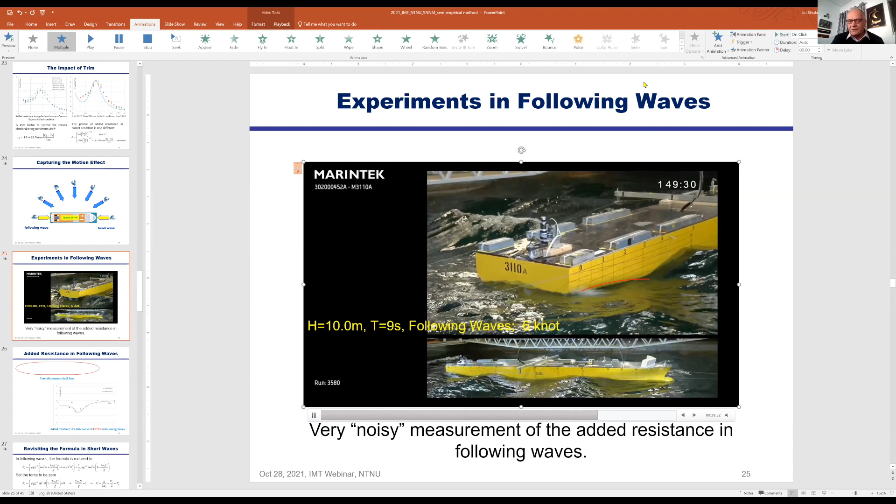And in fact, the phenomenon is also very difficult to be captured by a CFD code that could also be a reference, because for this SNNM method, the data generation is not only by experiments, but also by numerical codes.

But in fact, the only thing you can do at the moment is to collect many data from following wave cases and see whether you can see some trends. And what Shukui has shown here is that we could capture some effect of this, so that the results look reasonable. Otherwise this formula as generated would fail.

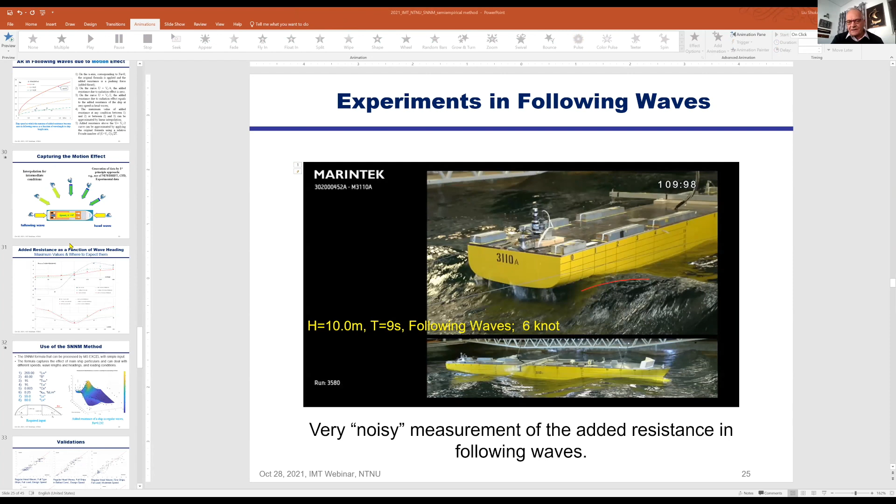So that is, I think, an issue that many researchers will still investigate and publish. Although in practice, this problem is in terms of regulations, EEDI regulations, and other things that come for the determination of the powering and so on. The following waves case is not that important, like the head waves case, which is the predominant case when you assess the powering and the fuel consumption and emissions of the ship according to regulation. Thank you.

Okay, and Shukui, very good job presenting. Thank you, Professor. Thank you for your supervision.

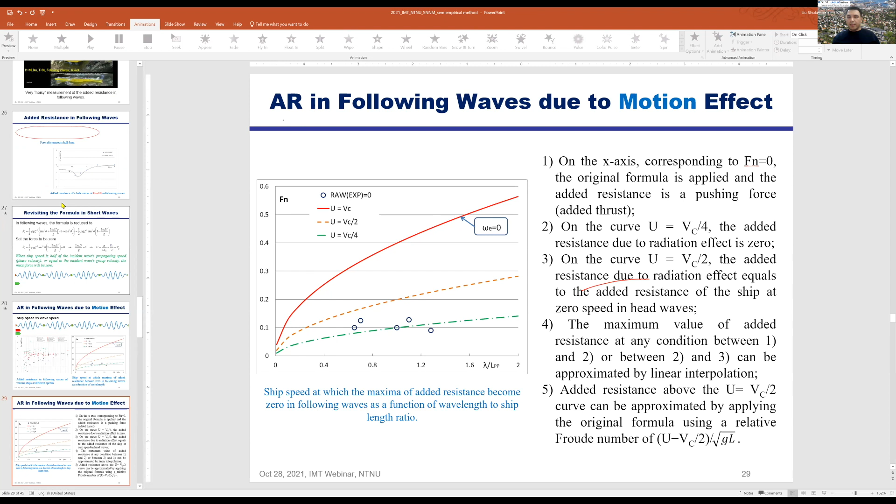Thank you very much for a very nice comment from Professor Apostolos Papanikolaou. And also I can see there are some questions from Renato from Sintef. He mentioned this method can be used, or if there's an extension for shallow water depths. And another question is how much would be the effect of capturing the realistic wetted surface or curvature on the ship operating at a selected draft?

Yes, okay Renato, thanks a lot for your question. I can answer this one by one. So the first one, extension to shallow or finite water depth - this is some ongoing work.

So as I introduced already in this slide - I don't remember, okay, this must be slide 17 - actually, if you apply a different scheme to calculate this reflection coefficient, then trivially this added resistance in shallow water can be captured. So we have done this work, and you can see in this graph the method is applicable. Okay, this is an empirical method, and it is applicable to the shallow water case as well.

We are working on possibly extending this empirical approach to shallow water as well, because at least in sea trials, some areas, let's say in the Far East where ship trials often take place, the shallow water effect can be of interest. So this is the answer to the first question - we are working on that.

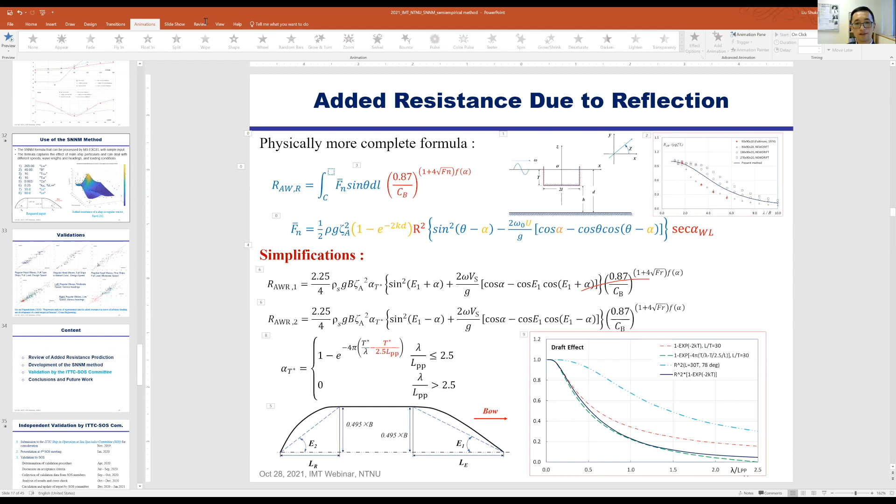Secondly, capturing the effect of the realistic wetted surface of the ship operating at the selected draft. Indeed, as input to this method we have actually draft at fore and draft at aft. So that being said, the impact of a draft change can be captured by this method. However, the accuracy - I don't know what kind of accuracy you are pursuing - that is some tricky point.

As we said, at least for ships under ballast condition and bulk carriers with a very high B over T ratio, we compared with experimental data, and the agreement is very satisfactory. So I hope I answered your question.

Yes, thank you very much, Liu. And there is also one more question, related to the applicability of the given method for bodies which are operating in close proximity to the free surface with a forward speed. So up to now, of course, the formula is applicable to ITTC, I mean for free surface piercing bodies with a forward speed, like ships. But what about bodies which are operating in close proximity of the free surface?

So the bodies are submerged and they are operating in a wave field. For instance, you will have a submarine which is moving with a forward speed but in close proximity of the free surface, so the submarine is actually submerged. So what about that? Could you please comment? Very interesting question, okay.